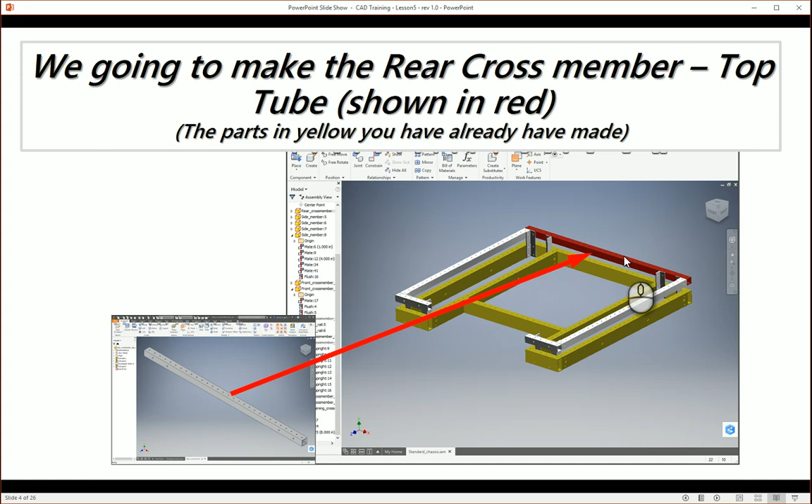So everything in yellow we have created. We're going to be creating this rear cross tube, the rear red cross tube. So let's jump to it. Create a part. Save the part. DWG2. Rear cross member. Top tube.

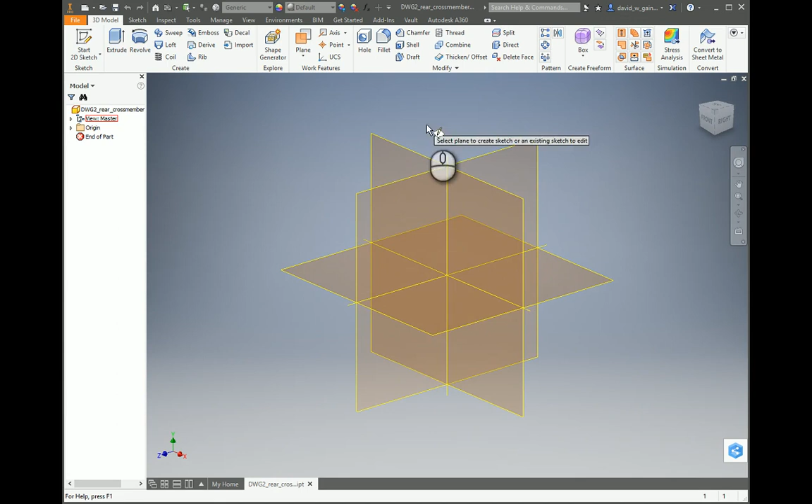Since we're going across the top, we're going to come from the side view. This time is a little different. We could set the two sides to be the same length. However, I like to run the two dimensions on. That way if someone changes their mind later, or I change my mind later, you can change it quickly. Come in and create another rectangle.

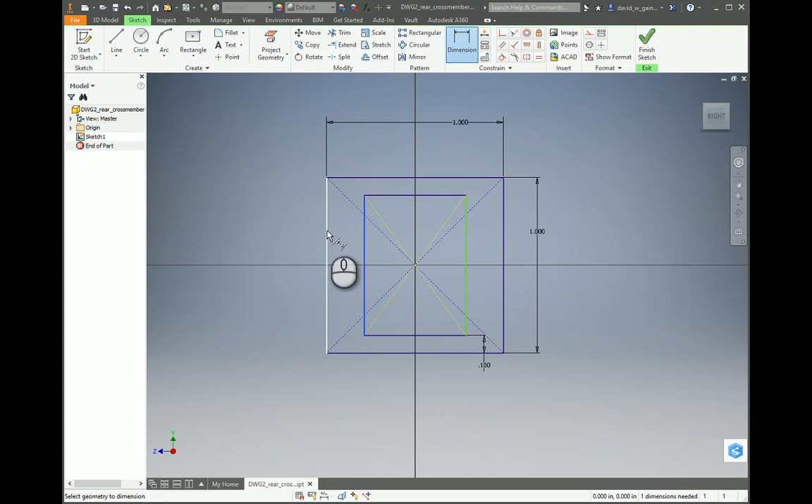Same thing, we're going to create the wall thickness. 0.1, 0.1. Oops, there was a mistake there. So I set that to 1. I'm going to hit escape. I'm going to double click on it, and I'm going to change it to 0.1. And that will fix it. Finish the sketch. Come in and extrude.

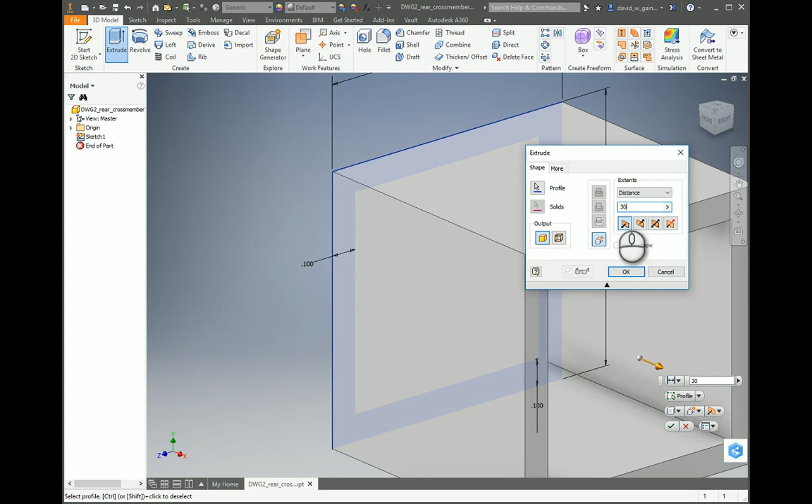Touch on this. The rear cross tube is 30 inches long. Set it symmetric. Say OK. Let's come in and change the material to aluminum 6061. We're missing the holes in the top. Let's come in and create holes. Basically pan down there. 0.164.

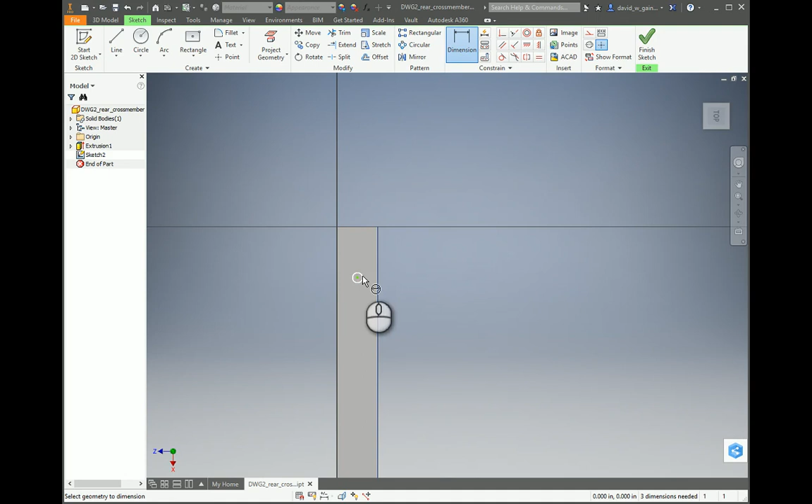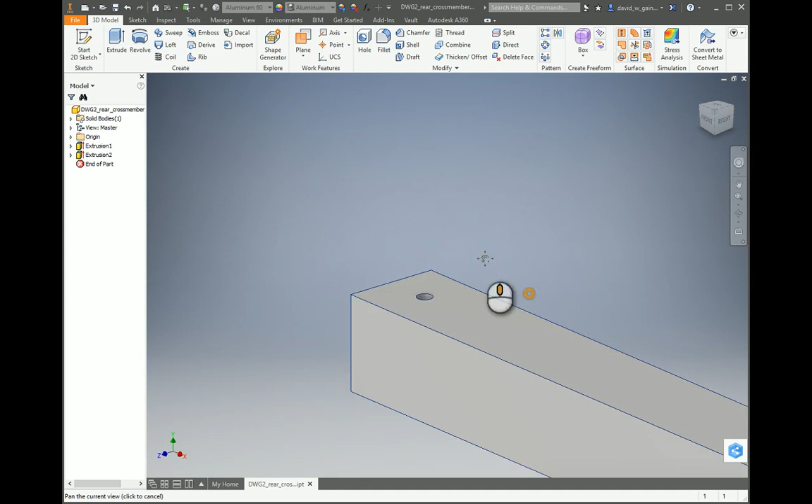Set the center of the hole to the center of the end of the tube. Dimension from the end of the tube to the center of the hole. Finish the sketch. Extrude. Cut through all. We're going to create a rectangular pattern. Come in and touch on the hole. Hit direction 1. Make sure you grab only the side. Flip the direction. 30 inches long, so 30 holes. Say OK.

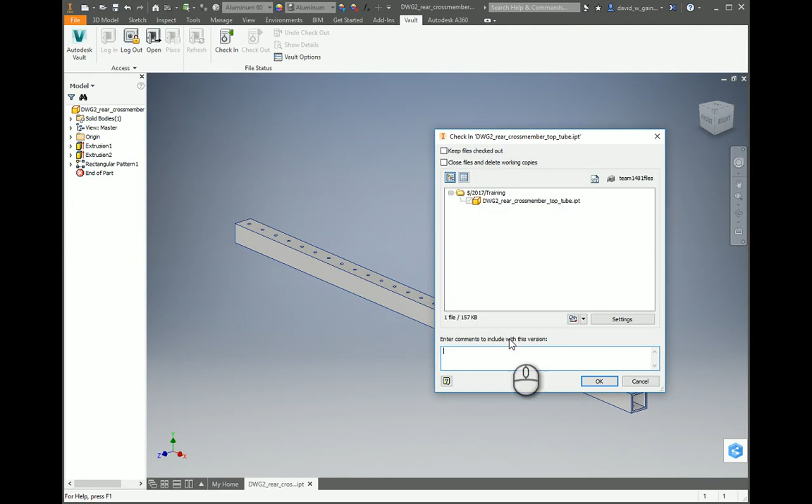Alright, we're done with that, so let's come in and say File, Save, and Check In. Now we're going to do something a little bit different. For the side rail top tube, we're going to come in here and say Save it. Oops, you know what, we forgot. I'm going to check it back out. Forgot to put the holes in the sides. Come in, put a hole here, a hole here. We're going to create holes from each end.

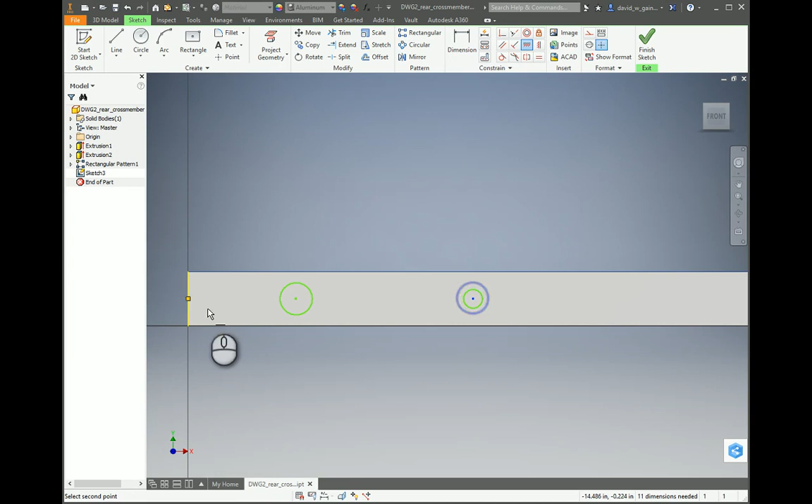So as we did before, we want to set the center of the hole to the center of the end of the tube. And I'm going to use that same reference point. Come to the center of the end of the tube here, the center of the end on the right side to the center of the hole. And now let's put the dimensions in between the end of the tube to the center of the hole. It's 1.625. And that same dimension will be on the other side. In this case, it's 2.75.

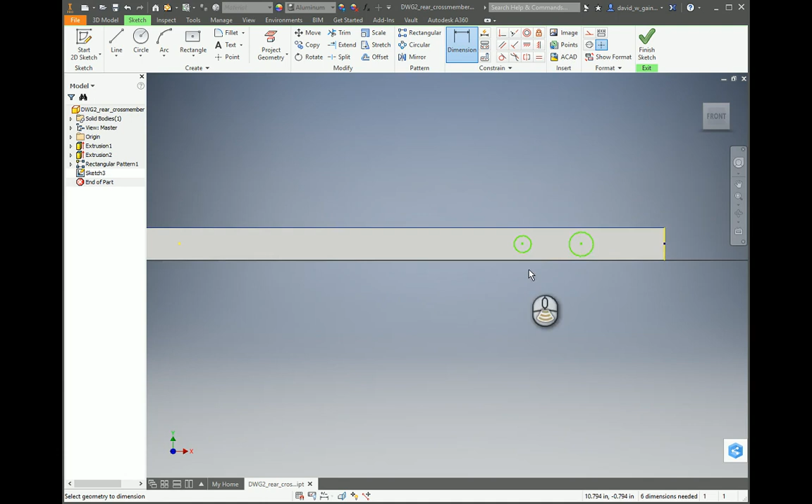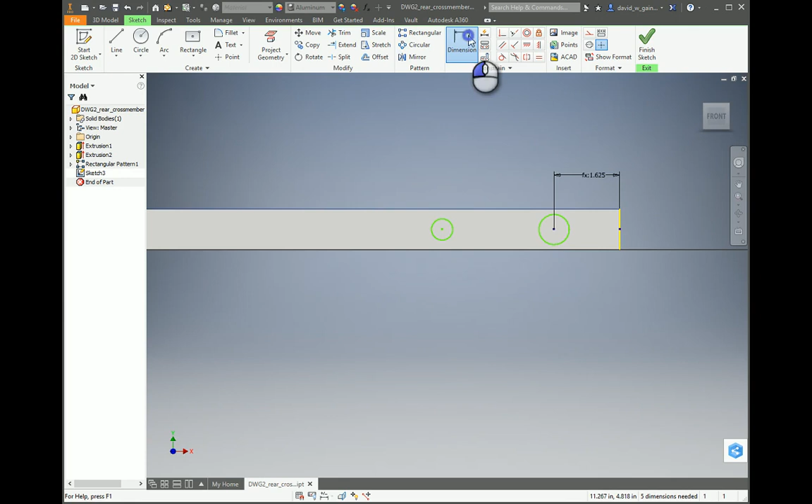Let me show you something new. In this case, instead of typing it in, let's say we want to make sure that both these dimensions on both sides are the same. All I have to do is click on that dimension. What it does is it links the distance on the right hand side to the distance on the left side. Let's do that again. We'll come in, zoom in, create another dimension here, and then touch on 2.75. And that immediately sets it. So if we change the dimensions on the left, it will drive the dimensions on the right.

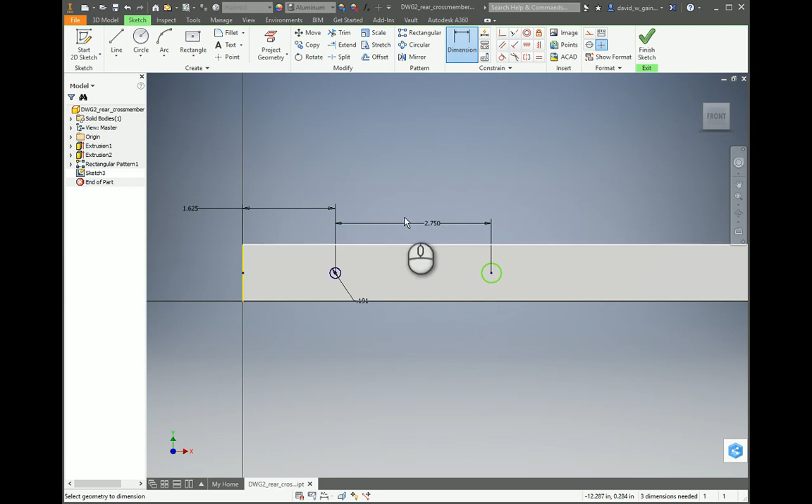And the one thing we're missing right now is the hole diameter. We're using 10-24 bolts, so that's 0.191. And now let's make all the other holes equal to the hole that was dimensioned.

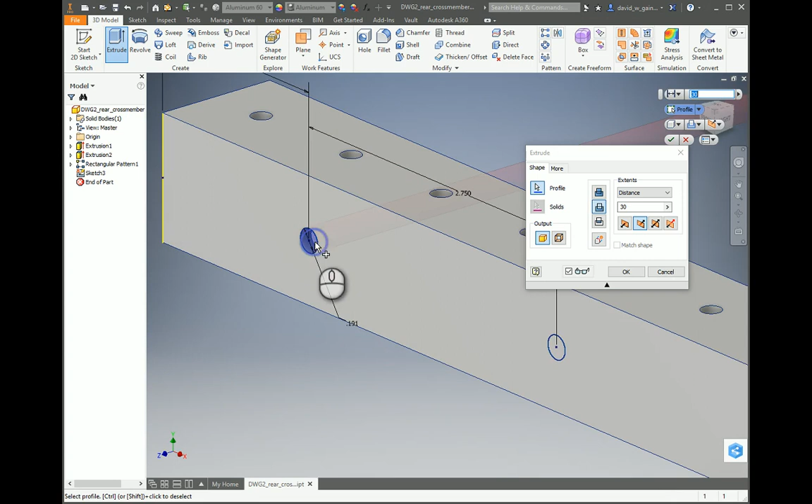Everything's blue, constrained. Let's finish the sketch. Let's extrude. Come in for the cut. Zoom in. Touch on the profiles. Set this to all. Say OK, and we're done. So let's save and check that back in.

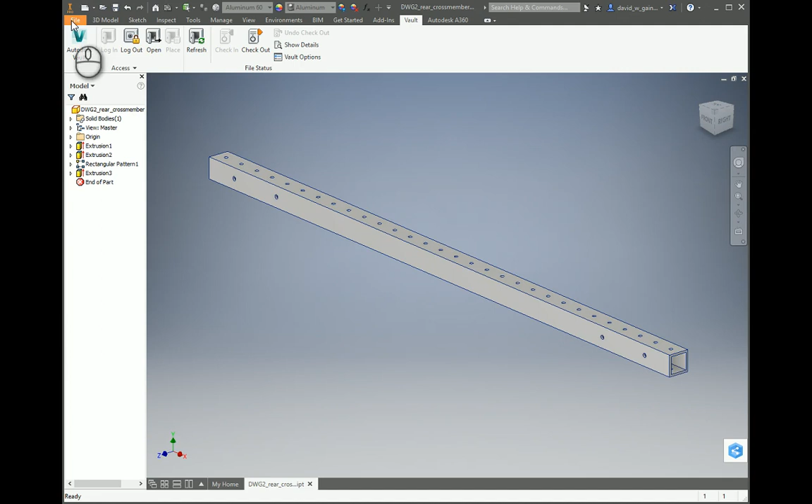Okay, so up to this point, we've been generating a new part every time. We start from scratch, create a new part. Now what we're going to do is we're going to save this part as a different part. So now we're going to come in and save this as DWG 2 underscore side rail top tube. Put your initials in for DWG. So now this is a brand new part.

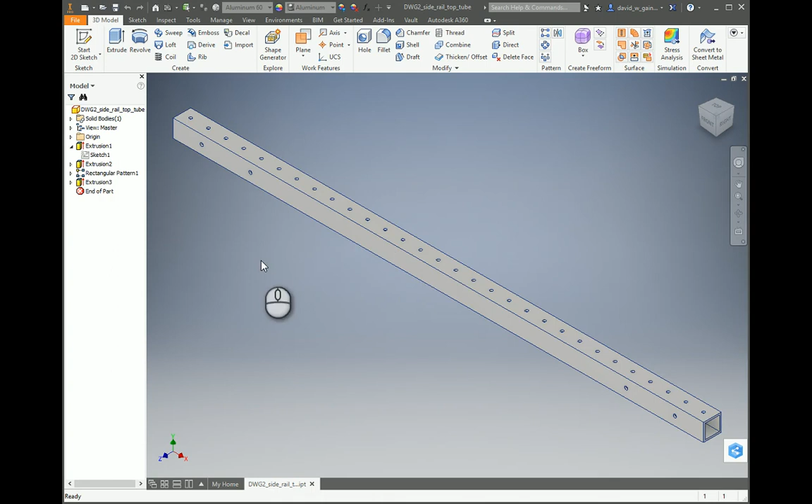What we've done is we just copied this part, and now what we need to do is make this for the side rail. So we need to change some of the dimensions on this part in order to make it work. So the length of the tube, the rear cross member, is 30, but the side rail is 40. So if we double click on this extrusion and we change the 30 to a 40, it automatically updates. But wait a minute, the holes didn't go all the way. Well, now we have to come in and double click on the pattern and change from 30 to 40 here.

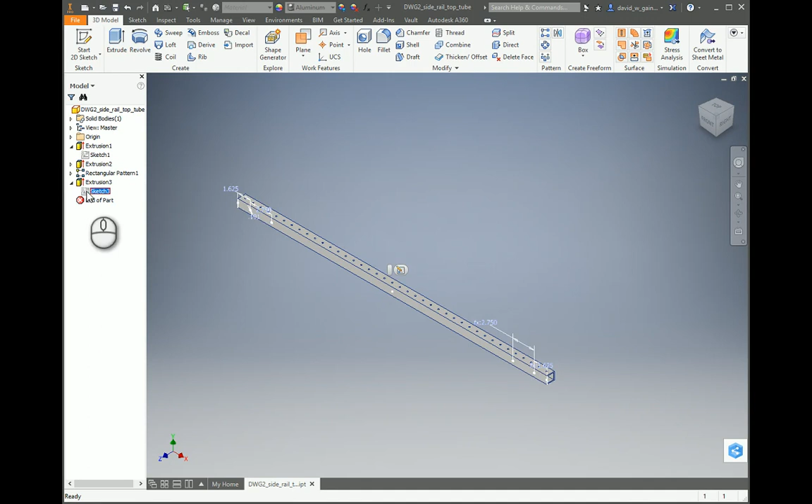And then, given the design of the part, the second holes on the inside aren't required, and the dimension changes slightly. So this sketch actually drove all of those holes. So if we double click on the sketch, it brings it up. I'm going to hit escape, and I'm going to touch on the left or the right hand hole on the left side and hit delete, and do the same thing on the other side over here. Delete that hole.

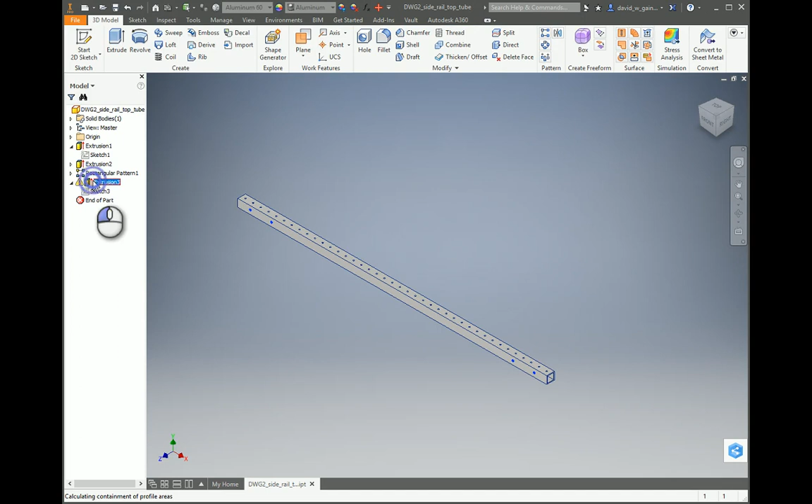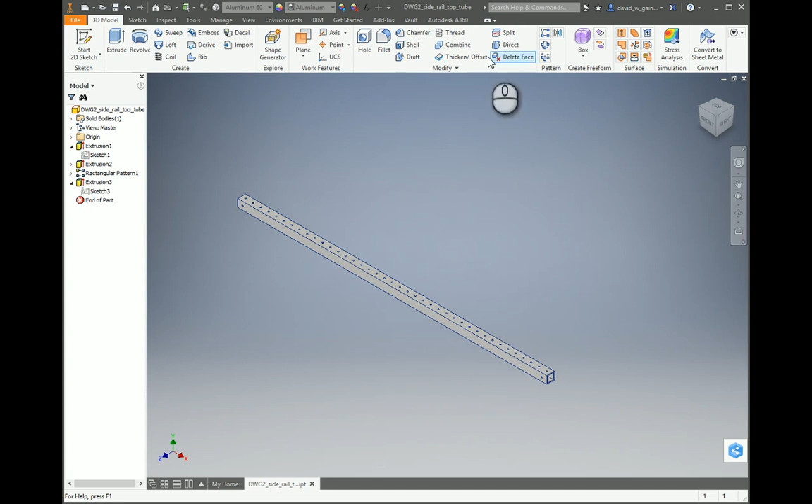Then, oh, this is going to be good. Double click on 1.625 and change that to 0.625. The hole on this side changes, the dimension from the end changes, and look, changed over here. Say finish sketch, and what happened is the extrusion got confused because it was anticipating 4 holes and it went from 4 to 2. So you double click on extrusion, it brings it back up, it corrects the profiles and fixes it. So the part is now done, which is a lot easier than having to create the section, put all the properties on. So we're going to say save, and we're going to say check in.

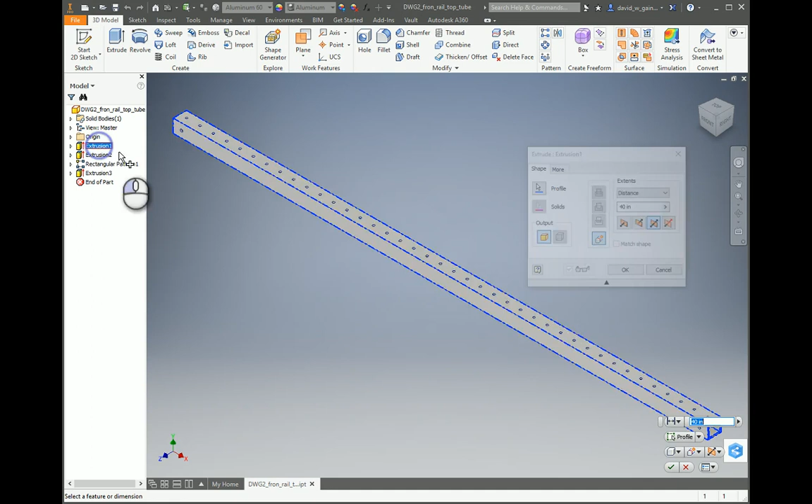And now we're going to do the same thing, but for the front top rail. So file, save as. We change side to front. Come in and say save. Let's set the length. The front top tube is 40 inches long. So we say OK, and the hole spacing needs to go from 5/8 to 1 5/8.

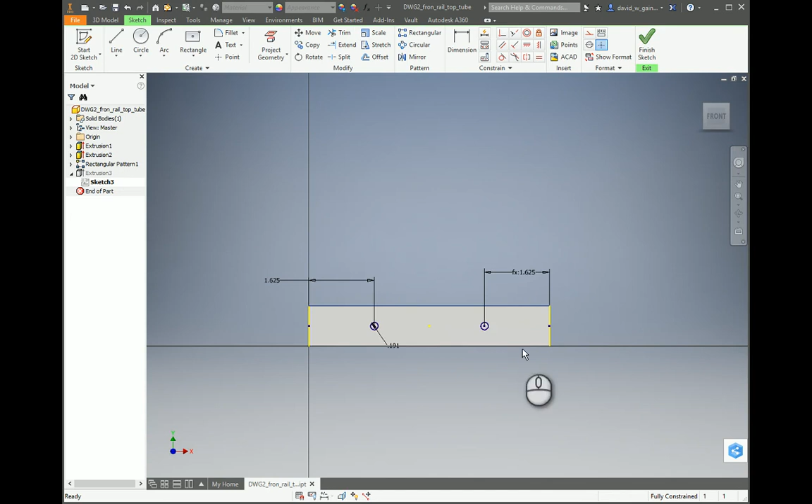You have to be asking yourself, where did all those dimensions come from? We'll get into that later on, what was driving these holes. These holes are used to basically go to the corner braces. 1.625. That updates. Say OK. And the part's done. Look how fast that was. That probably took less than a minute to do.

In fact, the original part took 16 minutes, and it's like 10 minutes and 45 seconds to make 3 parts. So we're now a little bit above 3 minutes to make a part. So we're going to save this and say Vault, check in, and we're done. Congratulations. That is the end of lesson 5.